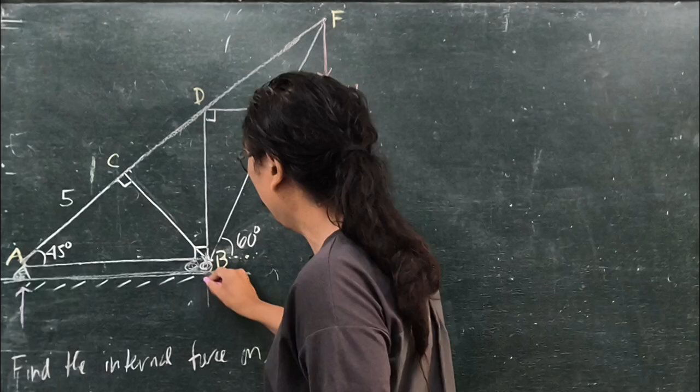Okay, I'll draw my assumed direction in pink and the actual in blue. Okay, since now we don't know the actual, let's just draw it in pink. And since this is the true direction, we'll just draw this in blue. Okay.

Okay. And of course, there might be a force going there. So since there's nothing there, let's just assume AX to be going in that direction. But notice here that automatically we can say that there is no AX without solving it. Because as you can see, all the applied forces are downwards, assuming that it's all vertically downwards. Are there any forces on X? None of the actual forces.

Okay? So when you take the summation of forces in x here, what you can see is that only AX, this is minus AX as our assumption, and there's no other force, right? So from here, we know that AX equals 0. Now, summation of forces along Y. What are the forces along Y? You have AY. Let's just call this A since AX is 0.

And of course, we know that B, since this is a roller, has no horizontal component, right? Because of course it can roll. So let's just call it A and B. So you have A plus B minus 10 minus 20, so A plus B minus 30 kilonewtons equals 0. From here, we have two unknowns, so we need another equation.

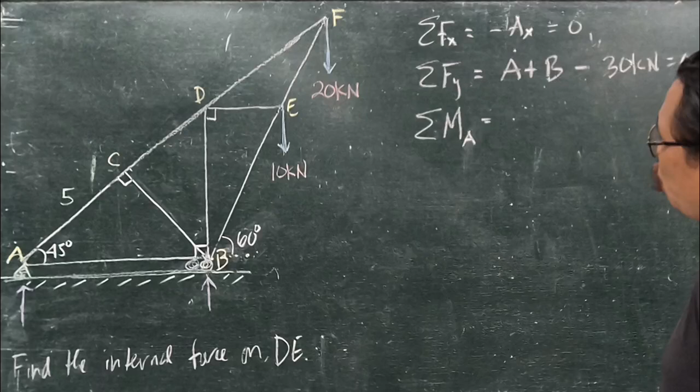And this is the summation of moment. Let's just use summation of moment at B. Or to make it more challenging, let's calculate the moment at A. Now, this is how you're going to practice: when you study, solve it again using a different approach, for example, try summation of moment at B and see what you get. You should obtain the same values. Okay, summation of moment at A.

What are the forces that create moments at A? Of course, we don't know the length of this yet, but we can solve it. This is a 45-degree triangle. Triangle ACB is 45 degrees. This means that this one is the same here, so this is also 5. And since this is another right triangle, this must also be 5. How about this one? What is the length of each of these?

We know that if you divide this into 2, these are congruent triangles, right? Because it's a 45-degree triangle, it follows that this is 45 degrees here because this is 90 degrees. So let's take this as our unknown, x. Before we do this, we have to solve the dimensions first. X squared plus x squared equals 5 squared, so 2x squared equals 25, or x equals 5 over square root of 2.

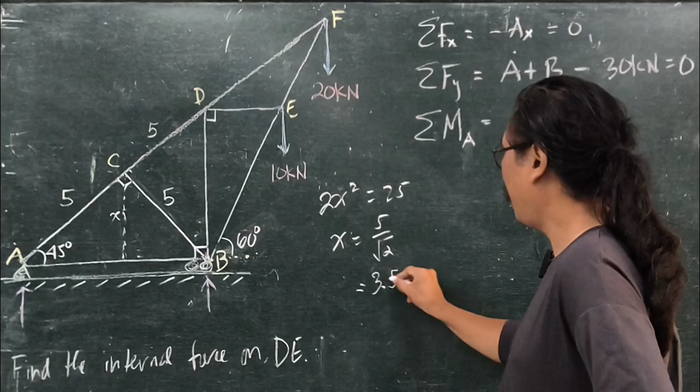What is this approximately? Can we calculate? 3 decimals, or just 4. We'll use up to 4 decimals. 3.5355, whatever the unit. But in your calculations, it's better if you use this one. The advantage of your calculator is that it can deal with this. This is much better because you're not rounding.

But if you must use the decimal, take as many decimal points as possible to minimize the error in the calculation. But this one is actually better because it's exact. Sometimes it gets quite long to write on paper compared to a single number. Anyway, so we know x. This means that the length of AB is just twice this.

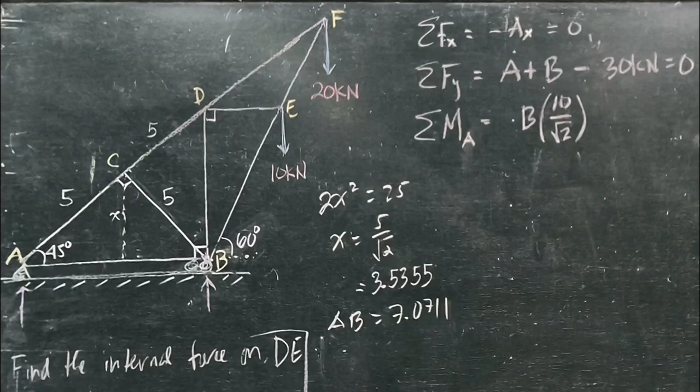So B is 90 degrees. It will create a positive moment, possible positive rotation. So that would mean B times the lever arm, which is 7 point, or I'll just write this as twice of this, right? So this is times 10 over square root of 2. Much better. Okay? But I will just take note of this one because maybe later, if it gets too complicated, then we'll use the number.

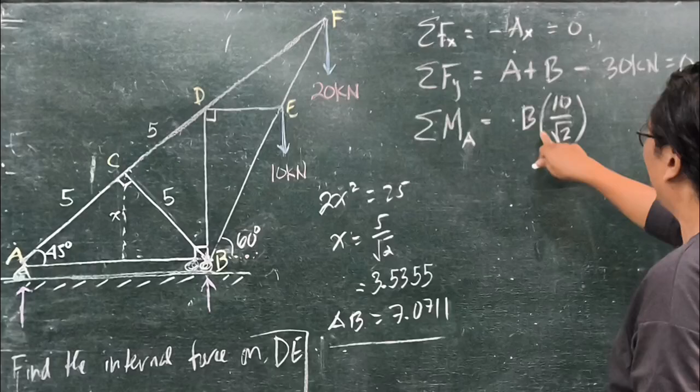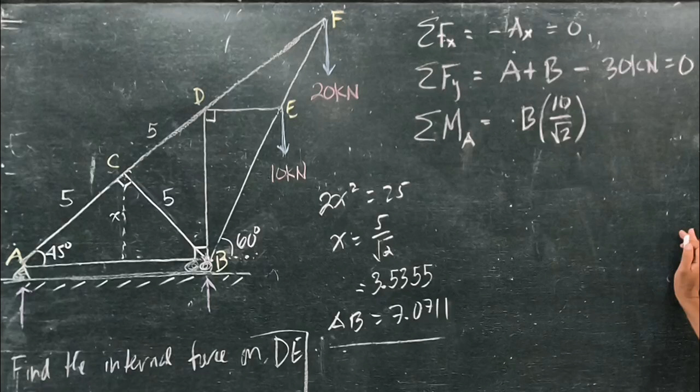Okay? So, nakuha ni siya, this is the lever arm, times sine of 90 is 1. Okay? How about this one here? So, now we don't know this. So, this problem requires a lot of trigonometry, right? But the good thing about this one is that it's all trigonometry. Okay? So, how do we calculate AF? What is AF now? We know AD to be 10, but we don't know DF. But of course, there's one more information that we can know.

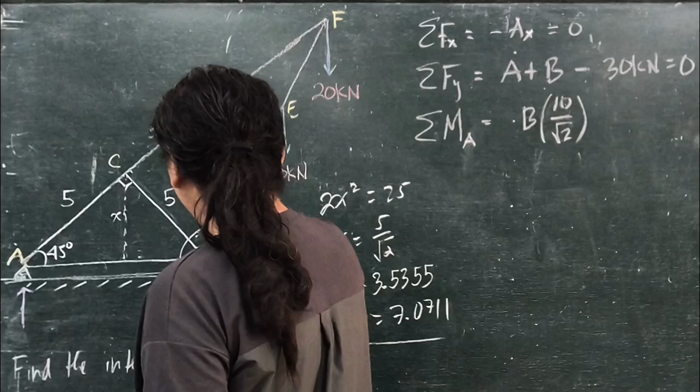So here, we know AB. What else do we know? We know this. We can solve for that, right? Easily. And that is just 120 degrees, right? Because this is 90 plus, since this is 60, so this must be 30. So meaning this angle right here, angle ABE, the measure of angle ABE is 120 degrees. So we can now use the law of sine.

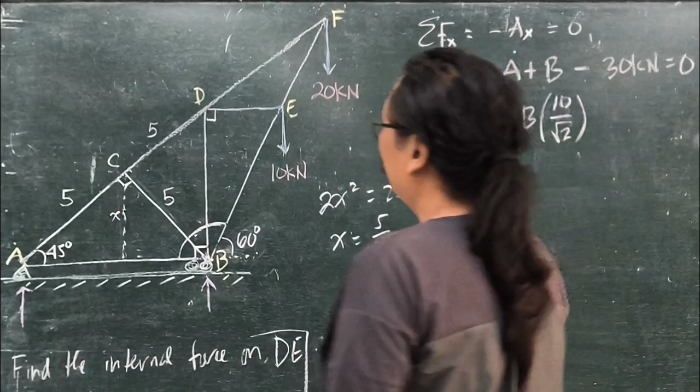We want this. Of course, we already can calculate this one, right? That is 120 plus 45, that's 165. 180 minus 165, this must be 15 degrees. So, using the law of sine, you have AF over sine of 120 degrees equals, we need a known side. This is the known side, AB, which is 10 over square root of 2, over, unsay angle niya kaatubang? That's 15 degrees, right? So this is sine of 15 degrees.

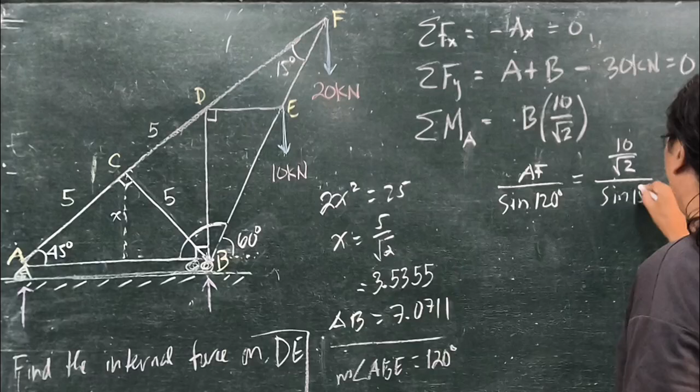So AF now would be equal to, input this to your calculator, 15 plus 5 square root of 3. Or in decimal, 23.6603. Okay? So we now have AF, right? Since we have AF, we must also know this angle. This is the angle of the line of force with the lever arm, right? So we must know this angle.

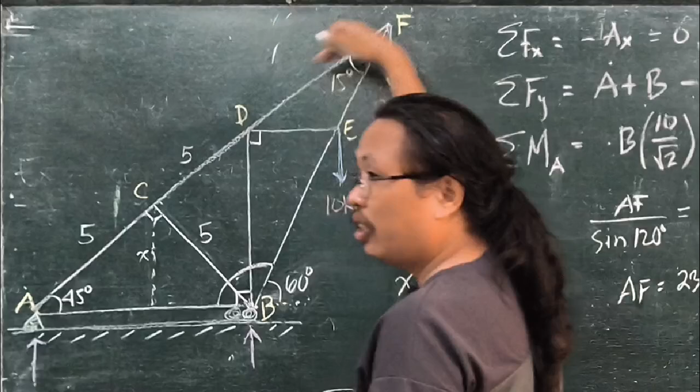What is this angle? Since this is 30, this must also be 30, right? Because here you have a right triangle. This is 30, this must be 30 degrees. So this must be 45 degrees, right? If you draw a right triangle here, this is 45. This must also be 45. So that we can now calculate this. It creates a negative moment, negative torque.

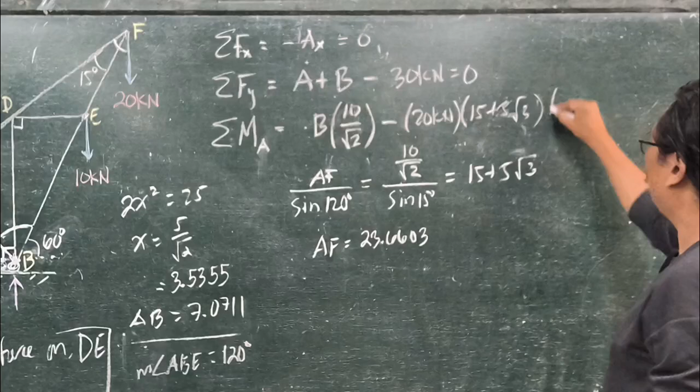So minus F, which is 20 kilonewtons, times the lever arm, which is, well, we can use this since your calculator can deal with this one, to be exact. So 15 plus 5 square root of 3 times sine of, what's the angle between the line of force and the lever arm? That would be 45, right? Sine of 45 is square root of 2 over 2. Okay?

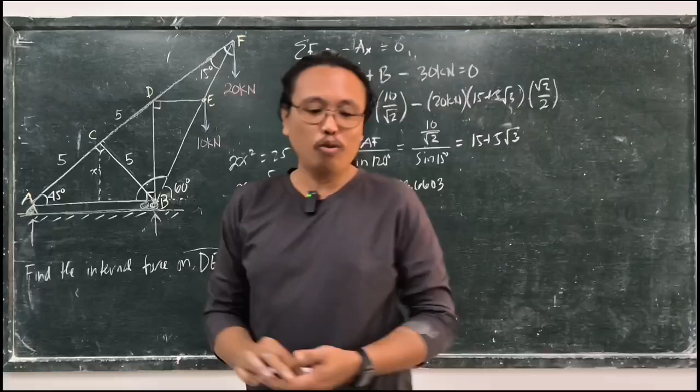And then you have this force here. So we need now to calculate this imaginary straight line here. Although there's no member here, when you apply a force at this point, it's as if this straight line to the pivot point, because this is the pivot point, is the lever arm. Whether there's an actual material there or not, that is still the lever arm, okay?

But it's easy to calculate this. Okay, what do we have now? Well, in order to calculate this, we need this triangle. We need another triangle, and this triangle is this.

This is a right triangle, right? We can calculate this height. This is just the same as DB. We must calculate DB first, and then, once we calculate DB, we can calculate this one here. Okay, actually, since this is 60 degrees, what we need is this, right? Because this is the dimension that we can calculate based sa ato ang dire.

What is given? Here we have a 45-degree triangle with a side of 10. So this must be 10 over square root of 2. In fact, DB is just AB. DB must be equal to AB because this is a 45-degree triangle, right? So here, we have to note that DB is equal to AB or BA.

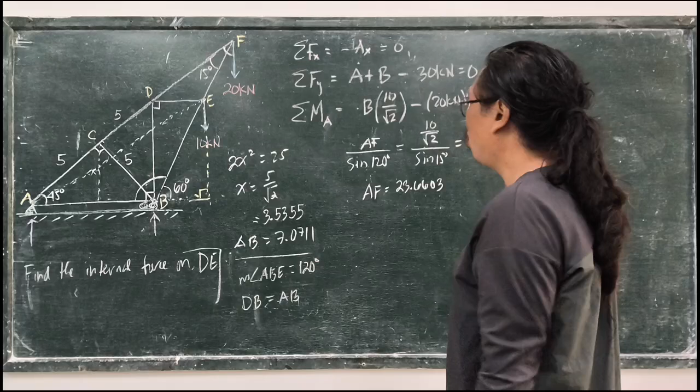So, we can now calculate this. We need this. If you were to calculate the moment at B, then you will need this one here. So anyway, we need this one. We can now calculate that. What is that angle there? Let's call this imaginary point Q. So how do we calculate for it?

Well, we know this, EQ. And we know that EQ is just equal to BE times sine of 60 degrees, right? I'll just write EB. EB times sine of 60, right? But sine of 60 is just equal to square root of 3 over 2.

From here, we can now calculate EB. Sorry, we can calculate EB: EB is equal to 2 over square root of 3 times DB. What is DB? Equals AB. What's AB? This is 10 over square root of 2. So this is now 20 over square root of 6. Okay, so this is 20 over square root of 6.

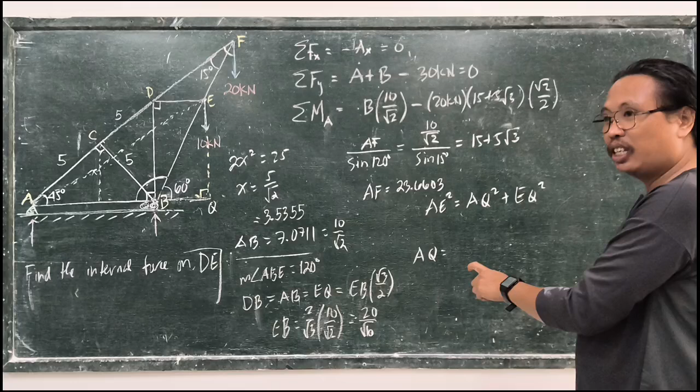Therefore, AE squared is equal to AQ squared plus EQ squared, right? And we know AQ. AQ is just equal to AB plus BE, so this is just 10 over square root of 2 plus 20 over square root of 6.

I hope that this is correct. Kindly follow my solution because basig masayop ta dire. So logically follow my solution because I have not calculated this prior to the class. I'm doing it on the spot.

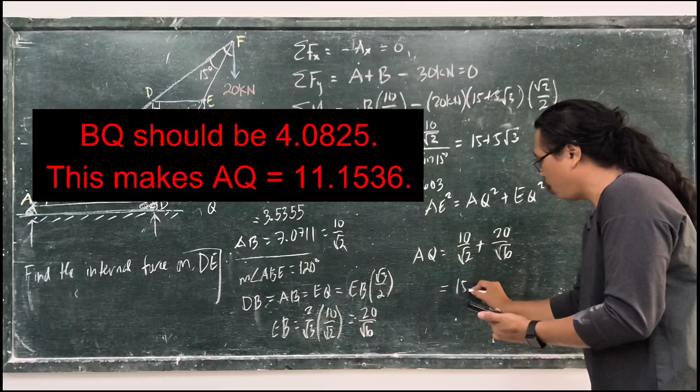What is this in your calculator? So this is now 15.2360. Now, pwede na ako ni siya i-square diretso. This is now my AQ. So, i-square na ako so that dili ako mo round up. Squared plus EQ squared. What is EQ? That is now 10 over square root of 2.

Squared. What you would get is 282.136, square root, 16.7969. So AE is equal to 16.7969 units, whatever is the unit of that. So this is now AE. That is just the lever arm, and this one creates a negative torque. So that would be 10 kilonewtons times the lever arm, 16.7969. But again, we need this angle.

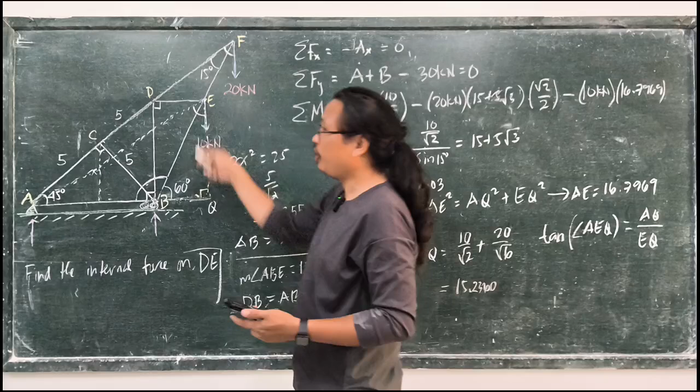What is that angle? Well, it's not trivial to calculate this angle, but we can easily calculate that. We know that tangent of angle AEQ, the angle that we're looking for, is equal to AQ over EQ, right? Can you still follow? AQ over EQ. We have this value. So angle AEQ would be equal to 65.1 degrees.

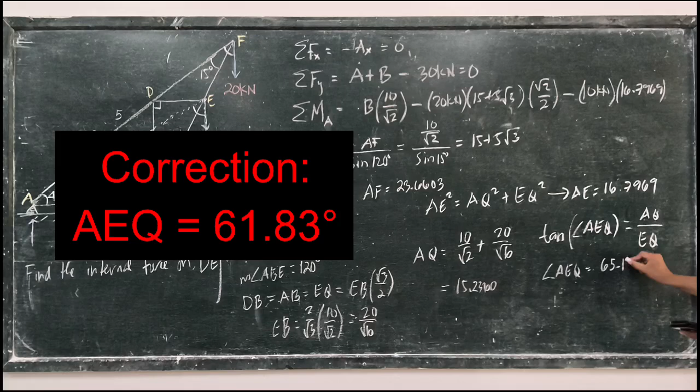Paki-check daw. Same. For the degrees, we can go up to 2 decimal places. So this is now times sine of 65.10 degrees, and this is equal to 0. From here, we can solve B, right? We can just do this in our calculator now. This is 68.8669 kilonewtons.

So we now have our B. This is important. Let's take note of this. I'll just write it here. The force on B is 68.8669 kilonewtons, if our calculations are correct. And I think this is correct.

And you see, this is quite counterintuitive. Ganong counterintuitive man eh, if we use our intuition. This is some sort of counterintuitive. We applied only a force of 30 kilonewtons, but there's an upward force here worth 68 kilonewtons.

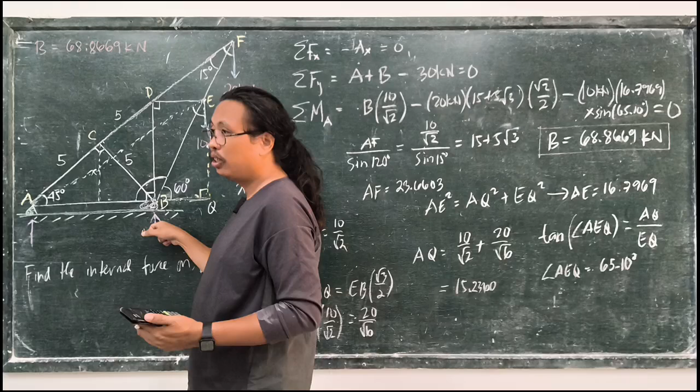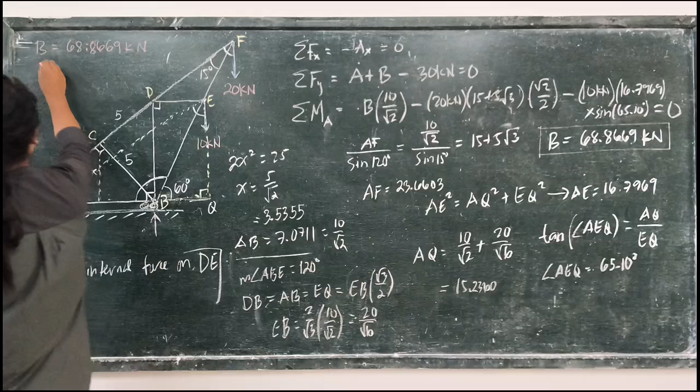This one is going up, but this one is going down. So I'll replace now with the actual value. Okay, this is up and this is down. Why is this? If we are going to analyze these reaction forces here, pag ana ni mo murag maukab ni siya diri, di ba? When you apply a force here, this is the pivot point. This will cause this to be detached. But in order for it to remain on the surface, the surface has to exert a reaction force downward.

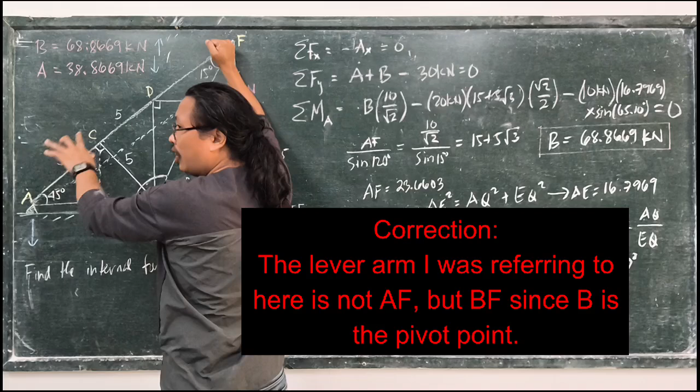And this downward force is actually the reason why it became larger than this one here, because of the lever arm. If you multiply, the larger that dito, mas dako ang force, right? So that's why mas dako siya sa 38. It's actually counterintuitive because we only applied 30 kilonewtons in total, and actually ang 30 na divide pa into here ug dire. Okay? So yes, we now have that.

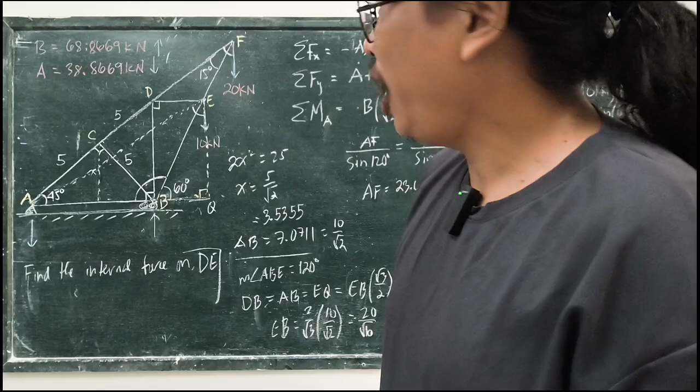And once we have that, we can proceed from this one padulong dire, and here. But before we proceed there, we can see that there's a zero member here. Asa ang zero member dire? This is a zero member, right? Ang CB. So we can now remove CB. We don't need this anymore because this is a zero member. Pwede natin siya i-diretso dito, no? Okay?

So, let's start with A, and then once we know AD, that is just the same as DA, only in the opposite direction, di ba? Nakuha? If you know DA, if you know kani, posible na siya padulong dito, right? Ay, lain ta na. Ana na lang. So, posible na siya padulong paana, tama? So kani, if it's going there, DA is going on the opposite side. But anyway, let's now start with A.

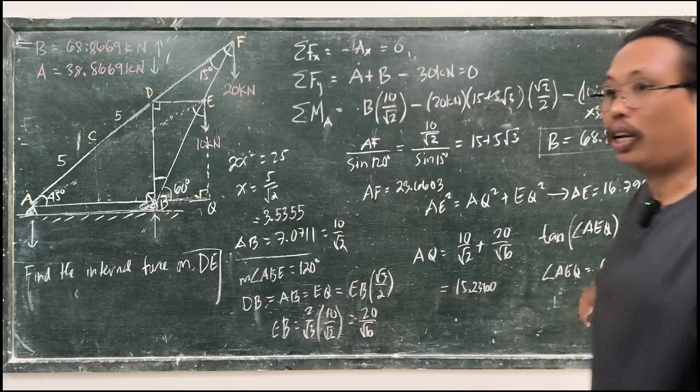I have to erase this. Na naman tayo values, right? Kindly take note of this. Have you written this one? Okay, pang-erase na ba ako? Ano yung mga dimensions? Maybe we'll be using this. Kindly take a photo sa dimensions.

And this is at joint A. What are the forces here? A is already actual, it's going downward. So we have here A. And let's assume AC and AB, the internal forces. Let's assume AC. This is an assumption, so I'll write it in pink. This is now AC. And although this is an assumption, it is a reasonable assumption. In fact, I'm certain that this is the case, because A is going down.

And AB has no Y component, right? So the Y component of this one can only be compensated by AC. There are only two possibilities for AC to compensate this: either AC is this way or that way. But of course, we know that this is where the member lies. It cannot go outside the member. So we are certain that that is the case. But let's just write it in pink.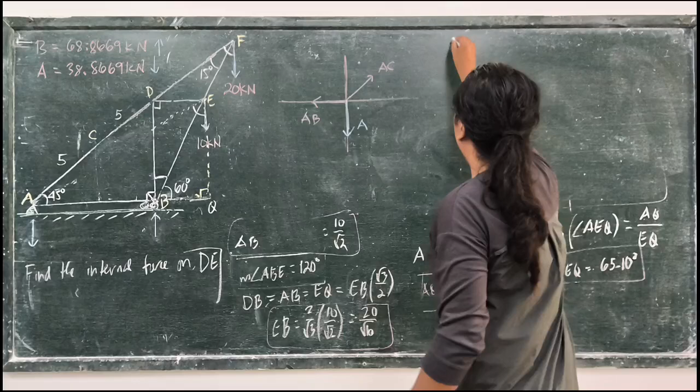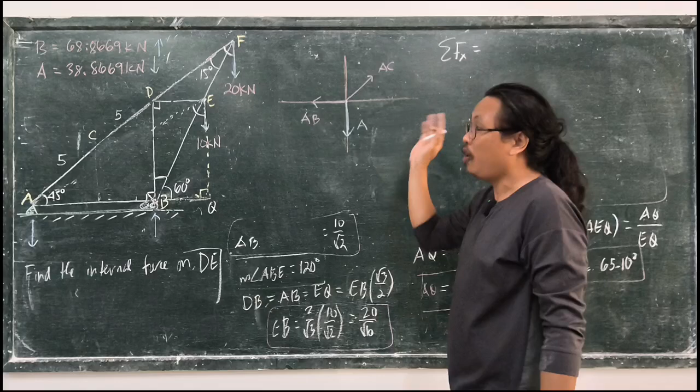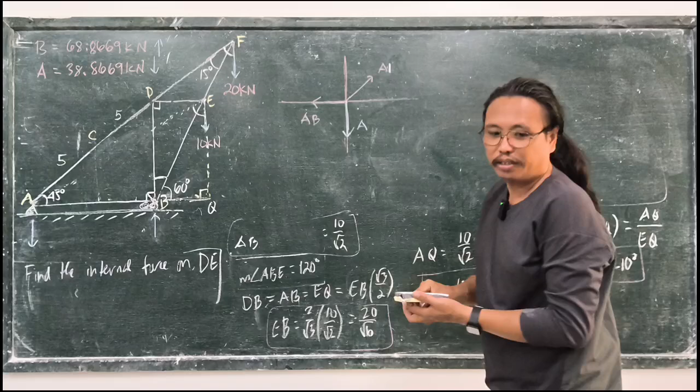Summation of forces along X equals, well, the advantage of drawing it right based on your intuition, if it's already possible, is that automatically we can shorten a lot of the process. What can we get here? Sorry, let's just use AD, right? AD. Okay?

What we are certain now is ADY is equal to A, right? It must be. AB could not compensate for A because it's purely on the perpendicular direction. Okay? And of course, what is this ADY? This is AD sine of, this is 45, right? So this is now AD times square root of 2 over 2. That's sine 45. This means that we can now calculate AD directly. This is just 2 over square root of 2 times what is A?

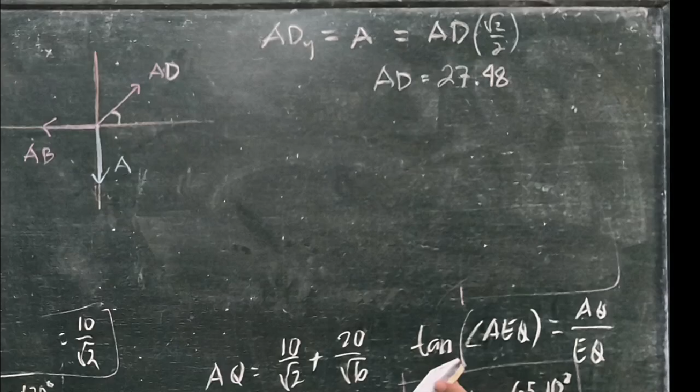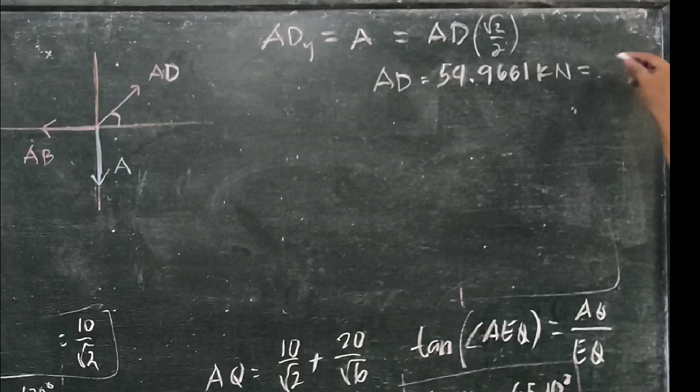38.8669 divided by sine of 45. 54.9661. This is 54.9661 kilonewtons. Or we can just say this as 2 over square root of 2 A. Okay, now we no longer need to calculate AB, right? Because this is our concern, DE.

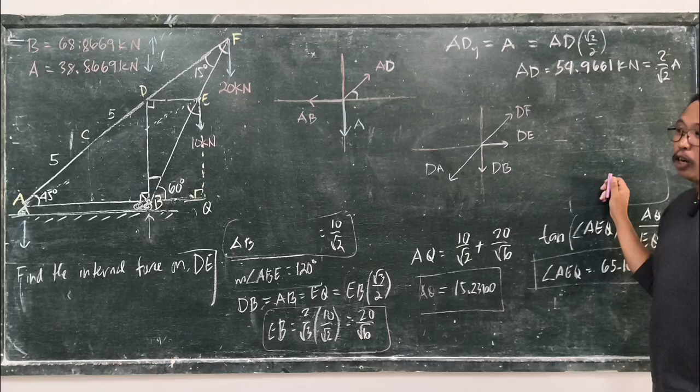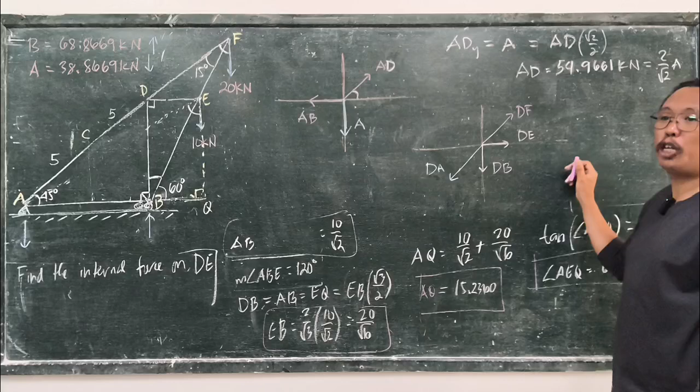Okay, not actually easily, but yeah, through this one here. So let's calculate. I'll erase it here. So I'll draw again. I'll calculate it at B first. Okay. Now, what we are certain here is we have B. But uncertain is, okay, let's assume DB.

Well, because it's like this, we could not be sure that DB is really going on this direction. Got it? Because we have another one here, which is what? This is BE. And of course, this one we're sure of. We are sure that BA is going this way. Why? Because, wait.

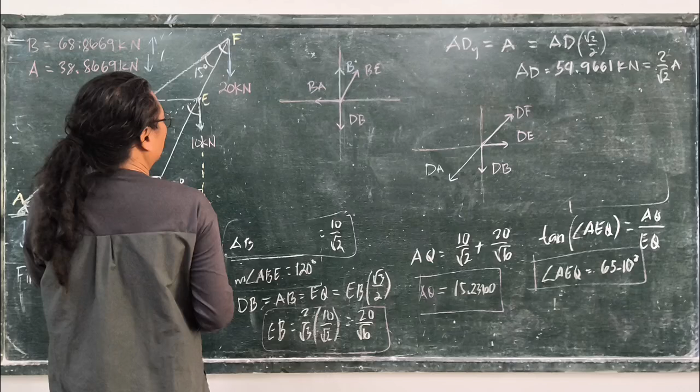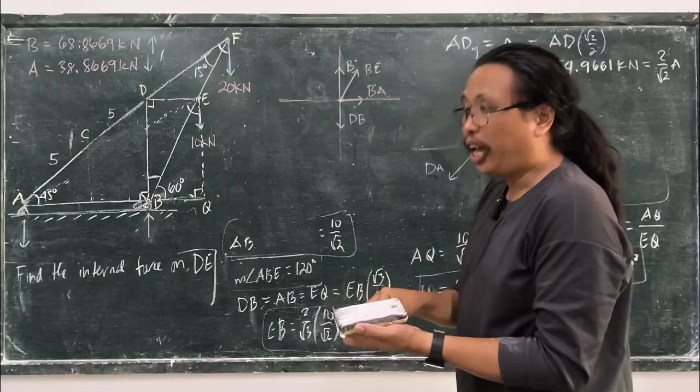Previously, AB is going this way, right? So, BA, we are sure of BA to be going this way, right? Okay, I write it in blue because we have already verified this a while ago when we solved for A, right? So this is now BA. Now, we can stop here, but we can just draw BE consistently. Let's assume BE to be here. BE is either this way or that way. But we are certain it's this one.

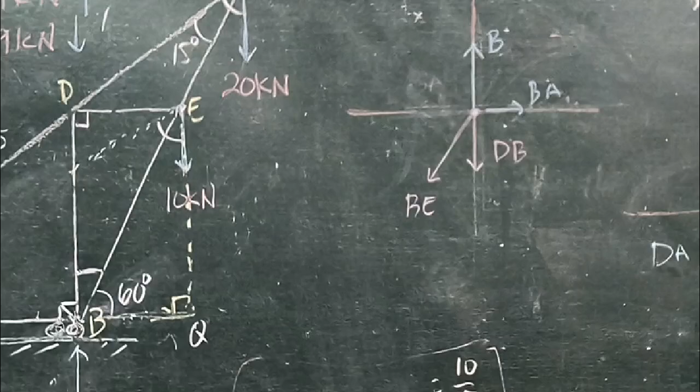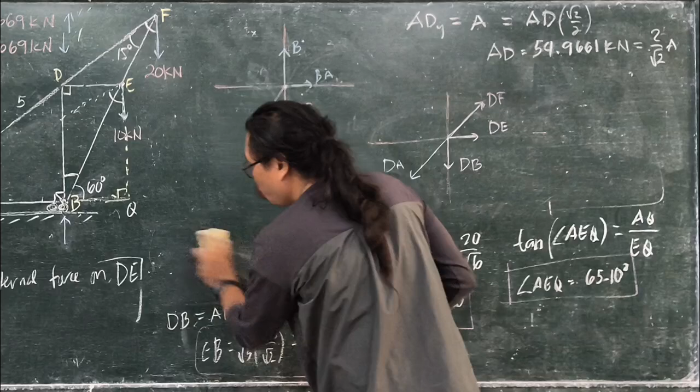Why are we certain that BE is going this way? We are confident even before solving it. Why? Because BA is going in the other direction, and B and DB could not compensate for the X component of BE. So BA can only be compensated by the X component of BE. Both of these have no X components. Okay? That's why I've said it would be better if you use your intuition first. You have to develop intuition in every problem because that will be your guide.

Okay, what we know now is that BEX equals what? BA, right? But what is BEX? This is just BE cosine of, well, we can find this angle, which is just 60, right? Cosine of 60, which is 1/2.

Cosine of 60 is 1/2. So BE now is just equal to 2AB. We should have calculated this already. What was that again? We should have calculated it. But anyway.

AB is equal to this. So AB is equal to ADx, right? There's no other X there. So this is just AD cosine of 45, which is just square root of 2/2.

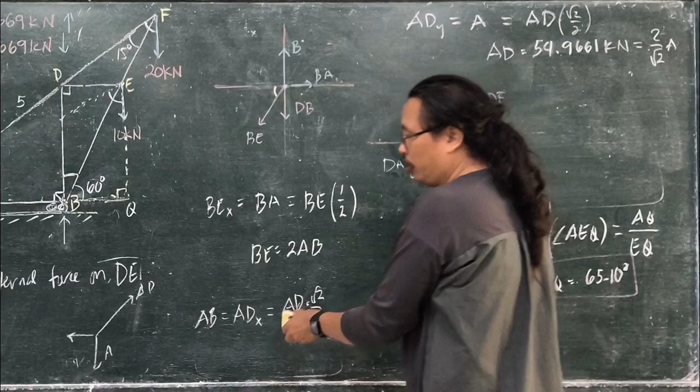AD times square root of 2/2, cosine of 45. This is the setup: AD, you have A, and this is now AB. This is just AD. What is square root of 2/2? This is cosine, because this angle here is 45, so this is ADx. So AB is just this.

What is AD? 2 over square root of 2, times square root of 2 over 2, times A. So this is just what? This is equal to A. It simplifies nicely if we keep on track using this approach. Sometimes it simplifies well.

So this is just equal to A. We now know AB is A. So where is this? AB is equal to A. So what is BE now? This is 2A, right? AB is... BE is 2A.

Where is BE here? This is not DA, this is... where is this again? Oh, it's here. Okay, this is 2A. Now, can we calculate DB now? Yes, using summation of forces along Y. We can now calculate AD equals A.

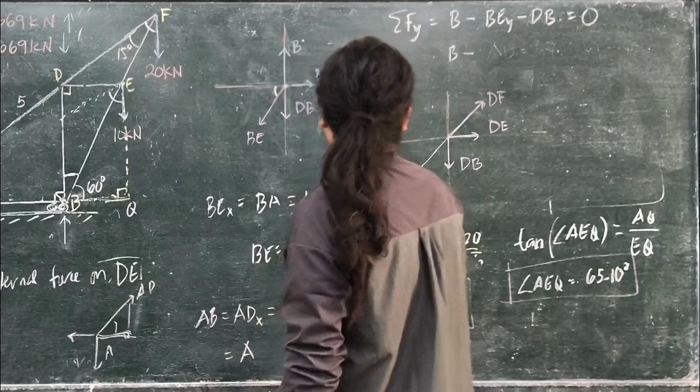What is BEY? We can find BEY. This is just B, which is given. So B minus BEY, which is BE sine of 60 degrees. BE is 2A, so this is 2A times sine of 60, which is square root of 3 over 2.

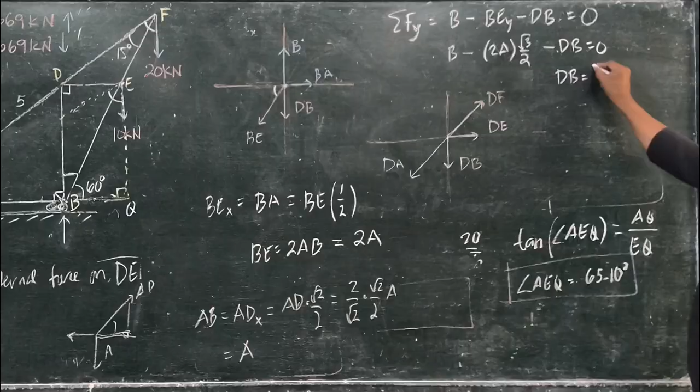Minus DB equals 0. From here, we can see that DB is equal to... this is A, right, and B. This is just equal to... we have to compute this numerically. This is B minus square root of 3 times A.

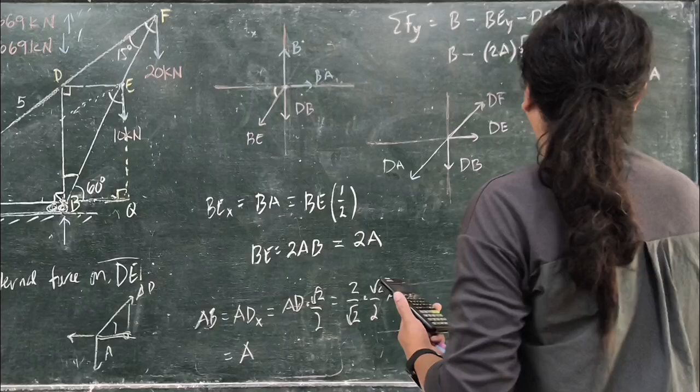So we have to use the decimal now. It's very small. DB is 1.5475 kilonewtons.

Now, what's the direction of this? The actual direction - this is positive, right? So meaning this is indeed the actual direction. We now know the actual direction of DB. DB is going down, because we get a positive value.

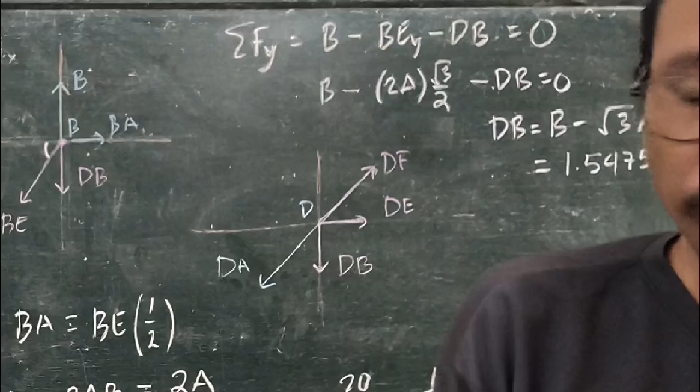So using this here - by the way, this is point D, and this one is point B, just to be clear. This was point B, and this is now at joint D. At joint D, since DB is going down at joint D, at B it must be going up. This must be DB, this was BD actually, no?

It's better to use proper naming. We just call this BD, meaning from the joint we are solving it at joint D. Yeah, this is a nicer convention, a better convention. The first letter is the joint where you are calculating it, the second is the next joint. So this is BD, so this is DB, right?

Because BD, by the way, this is BD. So this is now our DB, that one there. So we only have two unknowns left, right?

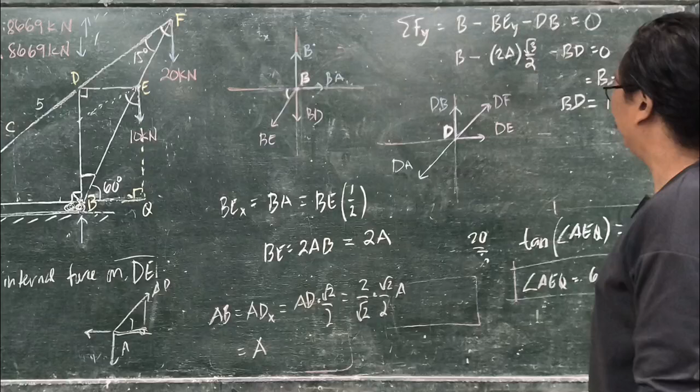We can now solve this one because we only have two unknowns left. Summation of forces along X: you have DFx, DFx minus, plus DE, minus DAx.

Minus DAx equals 0. The ADX is minus A, right? Yeah, this one is ADX.

Okay, this is just minus A. So what is dFx? Well, dFx is dF times cosine of 45 degrees. So that is square root of 2 over 2, plus DE. Okay, we have this equation.

And how about summation of forces along Y? DE has no Y component. What are the forces along Y? You have DB minus DAY, which is just A, minus, plus DF times square root of 2 over 2, equals 0.

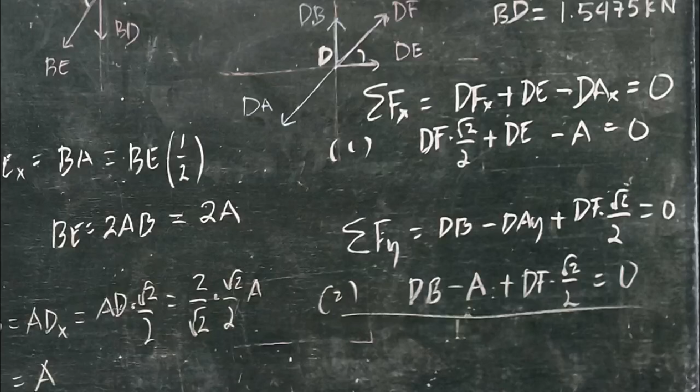Now we subtract the equations. This is equation 1, this is equation 2. We subtract equation 2 from equation 1. So this minus this is 0, so you get negative A minus, if you subtract, 0, DB equals A. If we subtract these two equations, what we get is this minus this is 0, that minus that is 0. You now have DE. This is now equation 1 minus 2 equals DE minus DB equals 0. So DE is equal to DB.

Have we solved DB? Yeah, we already solved DB. But let's check this. Let's verify it so that we don't pass on an error. Okay, what we already have is DB, right?

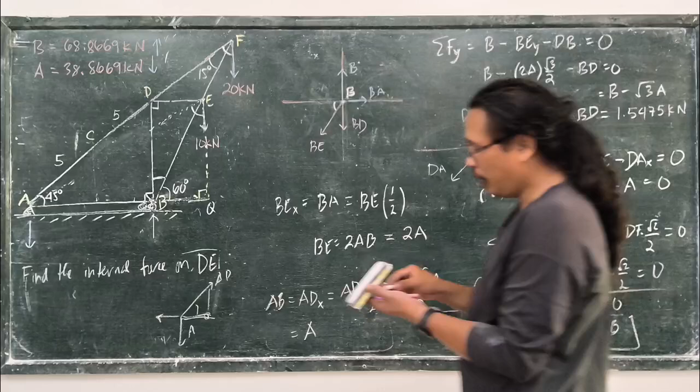The magnitude of DE is equal to DB. Did we get a positive? Yes, we get a positive. So positive input here. We got a positive, so this is now our A, the actual. This is now our DE, and of course ED is this. So we are experiencing a tensile force of magnitude equal to, what is DB? 1.5475 kilo newtons of tensile force. So DE is equal to 1.5475 kilo newtons.

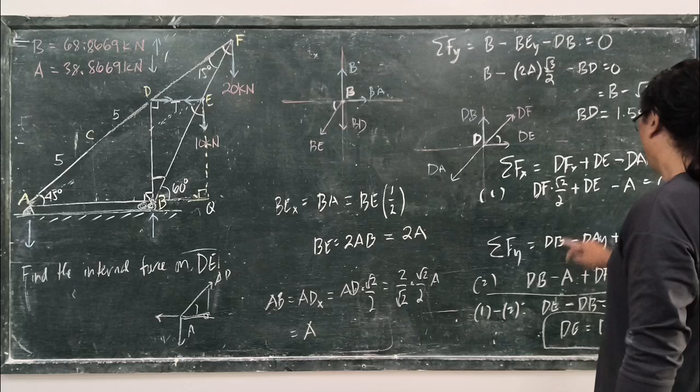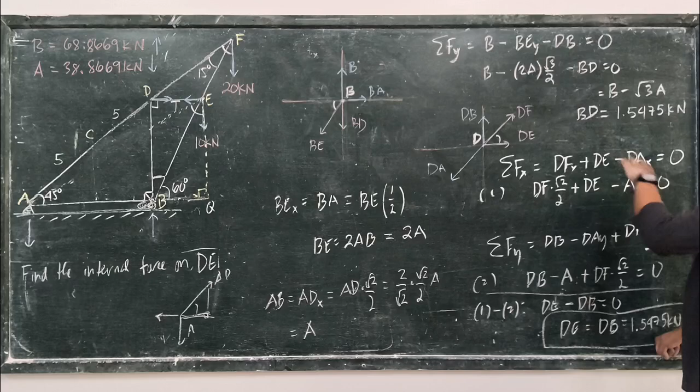DE minus DB is equal to, it's exact. DE minus DB equals 0, so DE is equal to DB. This is, I think, correct. But please review it, they don't have a video on this one. Please follow the calculations because we might have missed some along the way. Please follow the calculations here because although this might be incorrect if we committed some error, it's quite long, but the process is correct.

Okay, recap, what did we do? We first calculate the support forces, then we move from the support to the point we are interested in. So when we solved for A, we were able to solve A and B first. Now we know the forces at joint A. From here we were able to solve AD because it's already solvable. We have two unknown vectors here, AD and AB, two equations, two unknowns, so we were able to solve AD.

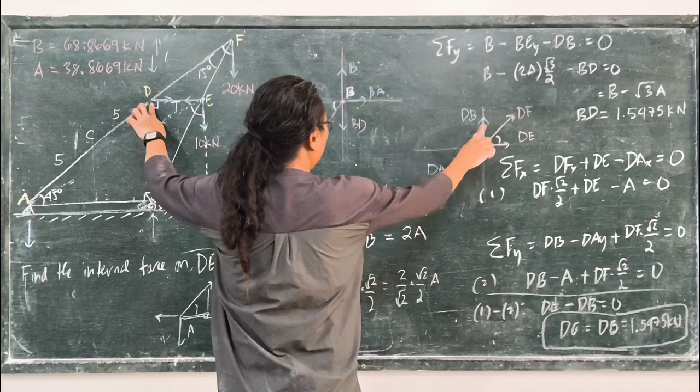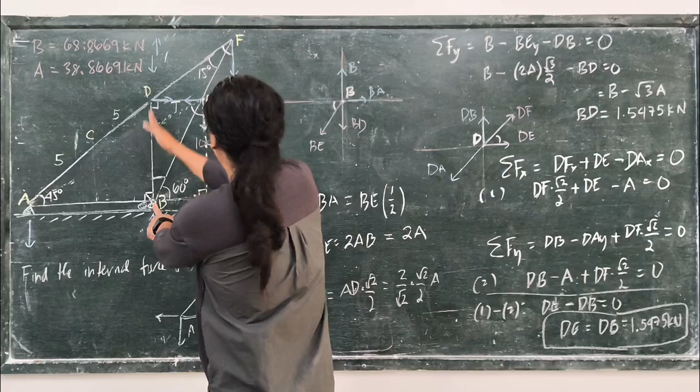When we get here, what happened is we already know this one because we already solved it. But we don't know the third. We must get another equation. But there are only two equations helpful at this point: the sum of forces along X and the sum of forces along Y. That's why we went here to solve this unknown. Did you get the process?

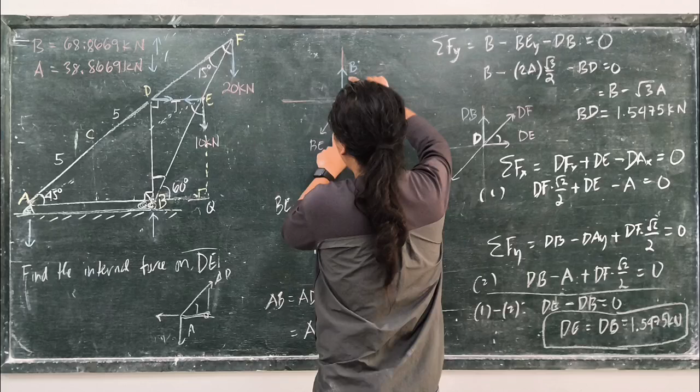Okay, so from here we can solve the unknown, because when we get here, how many unknowns are there? We already know BA because we solved BA here. So there are only two unknowns at this point: BD and BE. So we already solved BD. Did we solve BE?

How did we solve for BD? Summation of forces along Y: we have B minus BEY, this is our assumption, minus DB, which is BD, minus BD equals 0. From here we can solve BEY, because BE is 2AB, right? Why is that, AB, BA, BAX. BEX is just BE cosine of 60, cosine of 60 is 1/2. Yeah, that's it.

BEX, why does BEX equal BA? Why were we able to conclude this? Well, there's no other X here for the two, right? Only BE can counter it. AB has an X component. Therefore, BEX must be equal to BA in terms of magnitude.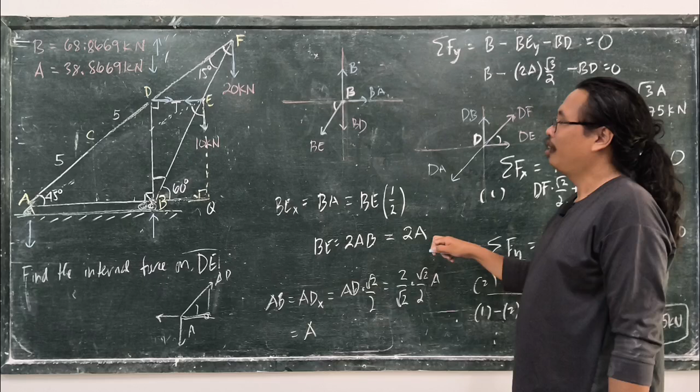BE times 1/2, BE cosine of 60. That's why we were able to conclude that BE is twice of AB, which is 2A. Why is it A here? 2A, why A again? This is the problem: was AB equal to A?

Was AB equal to A? Because it's 45 degrees. So that ADY must be equal to this one. And since it's 45 degrees, the X and Y components must be the same.

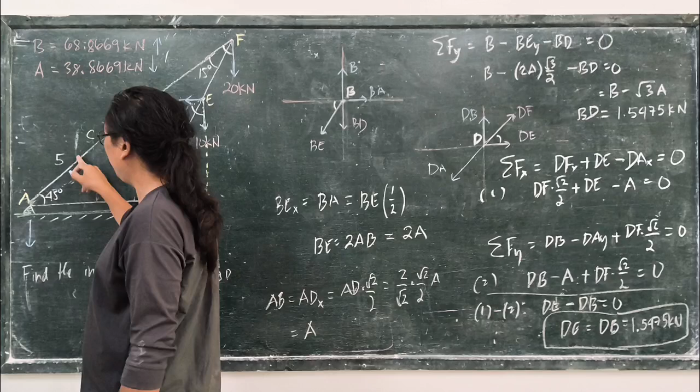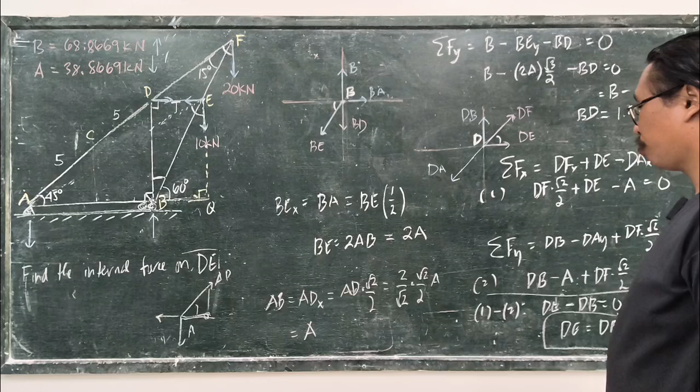So BE now is 2A. Okay, that's correct, I think this is correct. And once we've solved for BD, we now have DB here. It's going up because BD is going down. In fact, you can now find the forces, right?

What does this show? This is tensile. Expected, because it's pulling here, right? Tensile. And as you can see, what is BE? Look at BE, it's pointing, right? BE is pointing. So what does that mean now?

It's compression. It must be, because it's pressing here. It's compressive. That's why it's compressive. It's pointing here because it's pressing here. Yeah, it's compressive. And this one is tensile because it's actually being pulled.

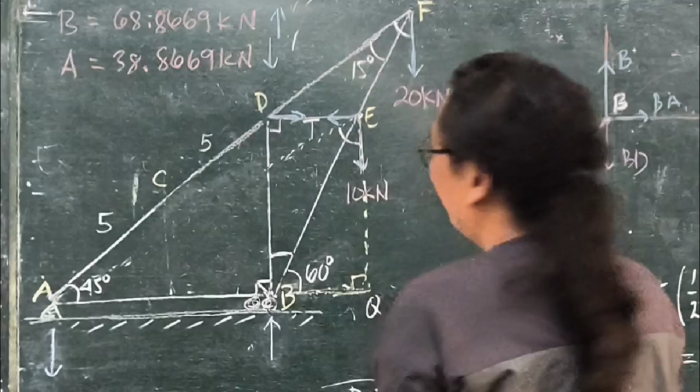How about DB? BD is... yeah, this is compressive. Compressive, tensile. How about AB? AB is compressive, because of this here. So AB is compressive. So we can add labels on this one here.

This is... let me write the labels. This one is compressive, no? This one here is tensile. Tensile, this is tensile. This one is compressive. Compressive, right? Based on what we've gotten.

DA, how about BE? Is it correct? BE, yeah, BE... wait. No, yeah, compressive, it's pointing here, right? It's pointing here. So these are compressive forces. Earlier we didn't have this, but you can work on that.

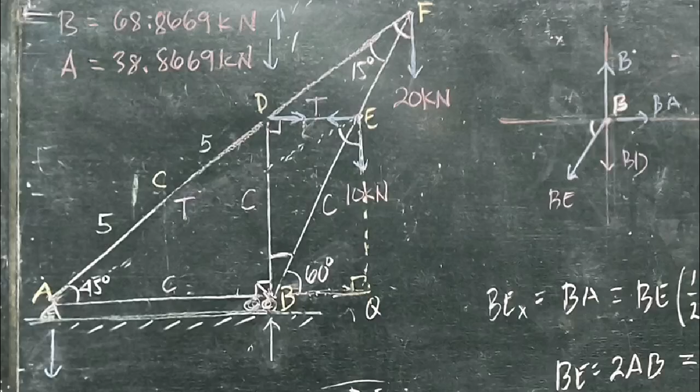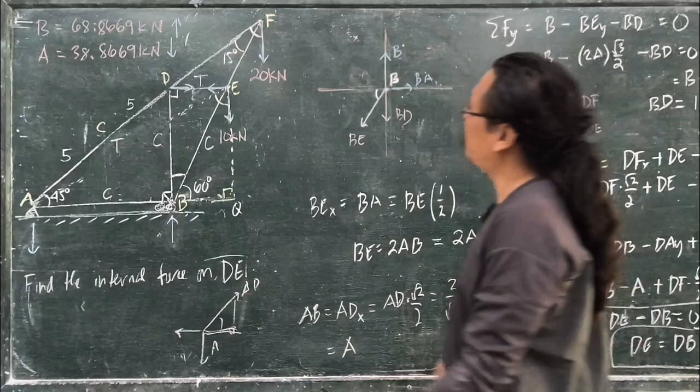We already have an idea on this. We already know this is the correct direction, right? We get a positive DE. Is this the correct direction? Yeah, this must be the correct direction.

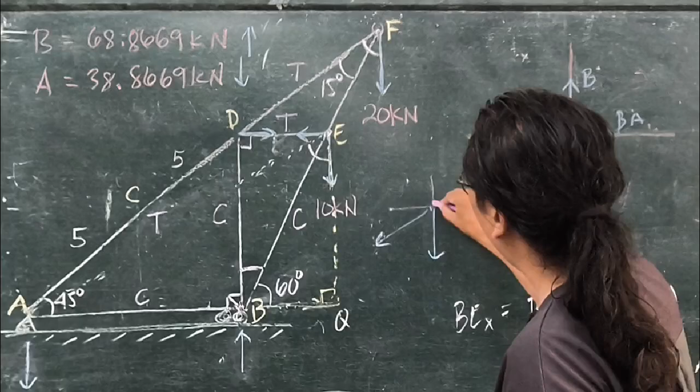So this one here is pointing. It's actually tensile. I think this is the correct direction. Tensile. And when you get here, you can already predict what this will look like, at point F. We have this, this is the actual one. And then you have this as assumed. This is already actual, okay, and only this one is the assumed.

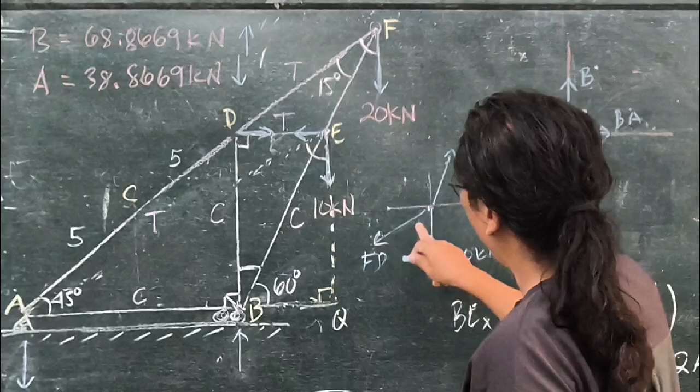Now of course we know this must be... look. This one right here must be EF. EF must be, this must be our EF, right? We know that this was our DF. So EFD, this is FD. This is the 20 kilonewtons. So in order to counter both downward forces, since it's going down, this must be going up, right?

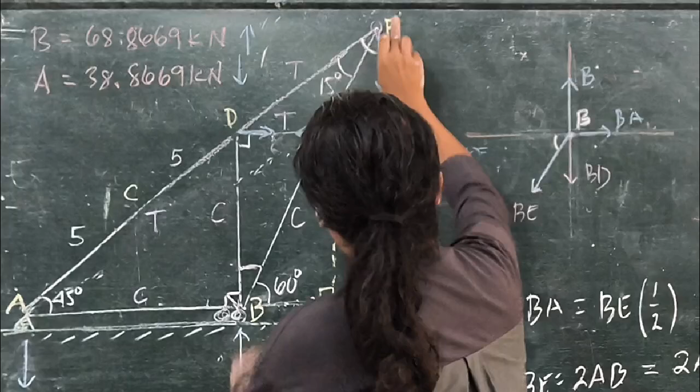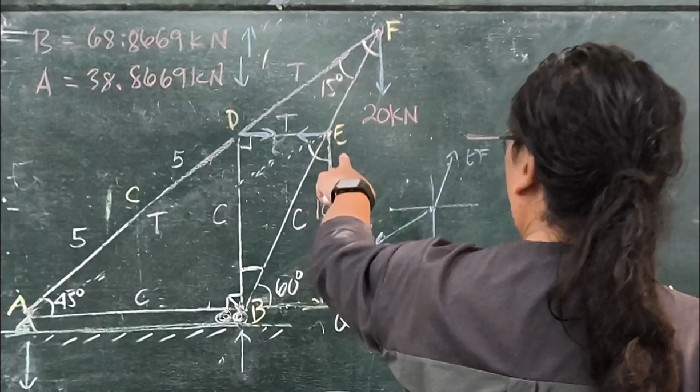So if you see, EF is going that way. And then it must be... EB is where? Oh, BE, isn't this pointing like BE? Wait, we haven't solved this yet, have we? But look, this is now tensile force.

Compressive force. When you look at E, can we predict at E? For E, you have a downward force, and this, and of course we have this, right? Time's up. No, EF is going that way, right? So meaning EF, this is EF right here, right? EF.

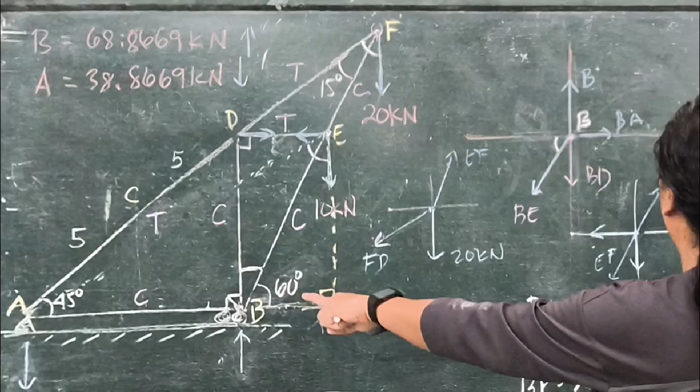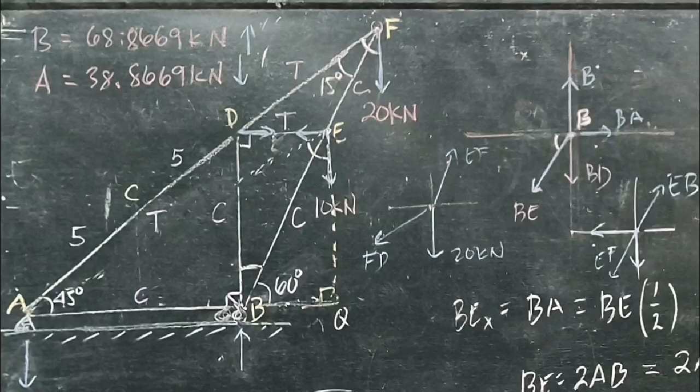And see that BE must be this way, right? This must be EB. But what was our BE? Our BE is going this way. Therefore, our EB must be going in the opposite direction. Right? So yeah, this is consistent now. We have a consistent result. Understood? Okay.

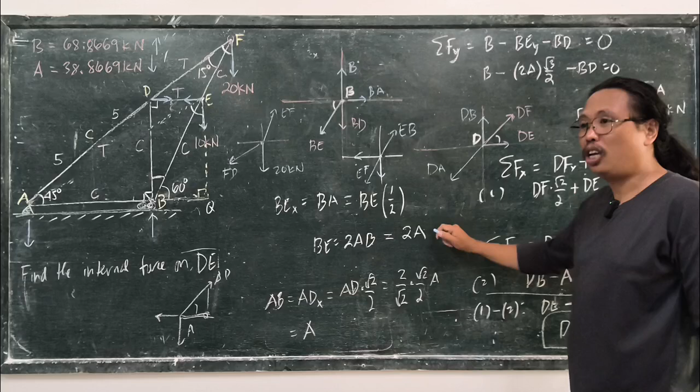Yeah, this is already a very illustrative example. For the rest of your work, the process is almost the same. I think we are now consistent. And again, as I've said, review the video. The process is correct, but we might have a wrong numerical value.